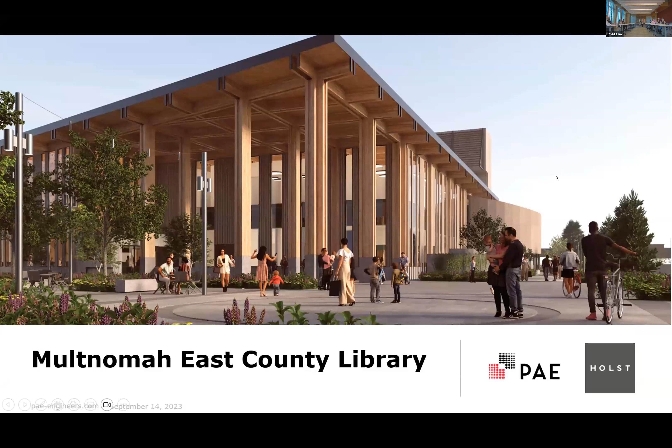Great, thank you for the introduction. Well, I'm going to go ahead and share my screen. I'm going to switch computers here, bear with me a minute, see if we can get this all set up. So can someone confirm that they can see this online? Yes. Great.

I'll introduce myself really briefly. I'm Jeff Beckford with PAE, associate principal. I've been with PAE for 19 years. Sadly, I recently relocated to Los Angeles, but I love Portland and we'll be coming back often. I'm really super proud and excited to be part of the Multnomah East County Library project. I've been involved with a number of projects around Portland, and it's bittersweet for me a little bit, but I love this project.

So I'm going to go ahead and get started. I'm going to do the nuts and bolts here initially. We already shared some of the learning objectives. Really hope you walk away with these four things, really understanding how we engaged with the community at large to develop this project, which wasn't our idea. And that comes through - I think you're going to get that a lot when you see what Dave is sharing.

We also want you to understand some of the resiliency that's a factor in this building, as well as operational and embodied carbon, so we'll talk a little bit about that. Some of you understand that already, but maybe you'll come away with a better understanding. And then how we're achieving some of the energy goals established for the county going in. So those are essentially what we're going to talk through: sustainability, resilience, carbon, energy, and some follow-up at the end about how that works with the sustainability frameworks on this project.

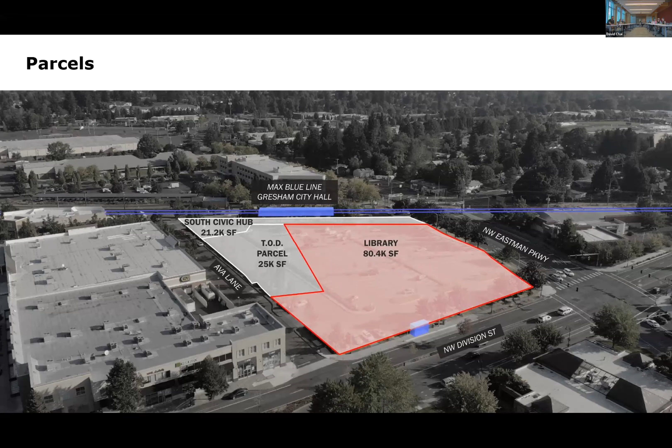And so then another piece of the puzzle was trying to figure out how we get people to interact with the frontages of the library. The library won't really have any back door or any backside. It has 4 sides that all front major public thoroughfares.

Eastman to the east, Division to the south, the light rail to the north, and then a new pedestrian connection that we're calling the north-south. We now call it the spine, connecting the light rail stop to the max stop to the bus stop to the south.

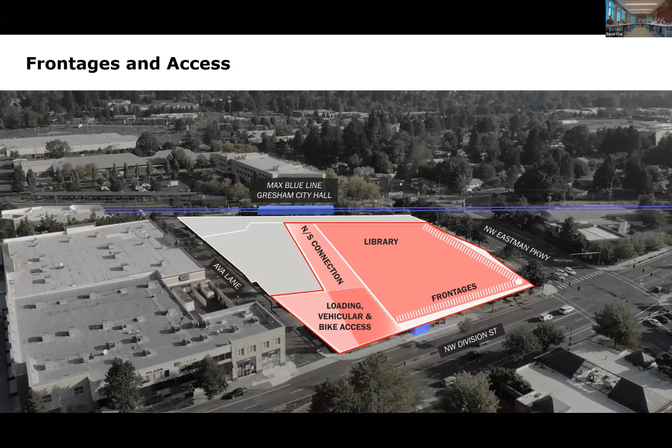So people will be able to walk on all 4 sides of this building without ever having encountered a back door. Loading vehicular access will go underground off of Ava Lane from the west to a below grade parking structure and loading bay, including the tall library trucks.

And so then we wanted to show a diagram that kind of explains the overall concept of how the building would get laid out, that also then impacts the site design.

We broke the building up into a few different zones. We wanted to make sure you could get into this building very easily from multiple locations, so there's 2 main entries, one on the north, one on the south.

That north-south spine connects through the middle of the site, and that's really where the public can engage with the library, where the most public aspects will be. The middle of the library is really where the stacks and the books will be for exploring, and then focus areas, places of quiet, places of being alone or being introspective are along the east with views out to Mount Hood.

And then I think, let's see, what was the piece I wanted to say about engage? Well, I'm sure it'll come to me as we keep talking. Oh, that's what I also wanted to say.

One of the things we recognized very early on was the high amount of wind that exists out in Gresham. If you've ever spent much time in Gresham, it can be very windy from the gorge. Part of why we're putting a lot of emphasis on that north-south spine is because we're trying to use the building as a windbreak to shield from the easterly winds, so the entrances are on the west.

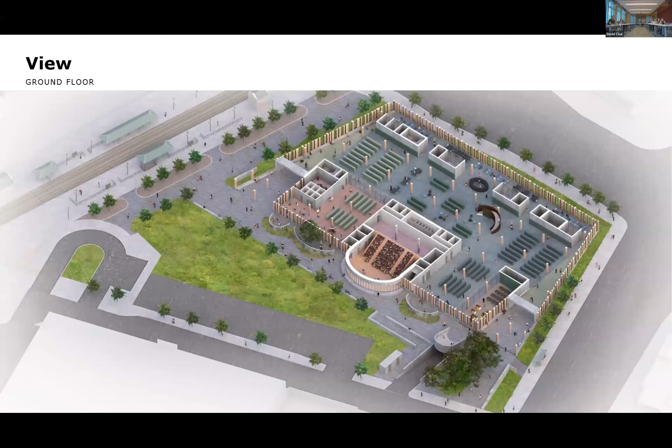Here you can see a cutaway plan section of the first floor. This is that north-south spine coming through here, the ramp down to the garage below.

One really interesting program element that was added early on was that of an auditorium, about a 250-seat auditorium. Through community engagement, we recognized that there are not very many places for people to gather in East County, especially folks that can't afford to pay for space. So Bailey and the library team and the design team really wanted to find ways to infuse as many gathering spaces as possible.

And the auditorium is a really big piece of that. There's no other room like that in the library system here in Multnomah County, and especially out in Gresham, it's very hard to find spaces where you can have presentations. So that became a sort of organizing element that is a central piece to the library.

And then you can kind of see how that parti of engage and explore and then focus kind of lays out in the floor plate.

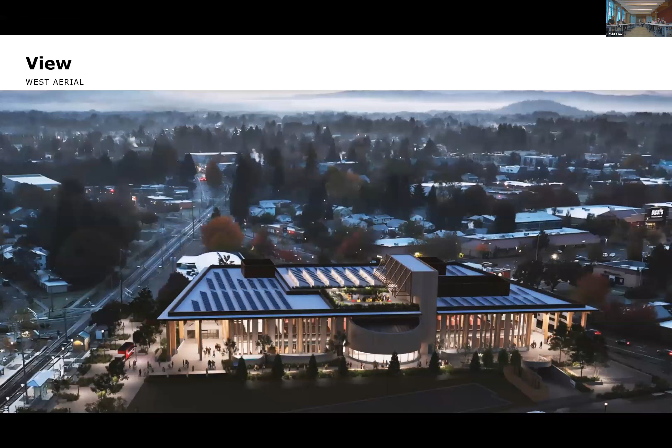So I'm just going to give a really quick tour around the building and then go inside, and then we'll hand it off to Jeff to talk about the meat and potatoes of this presentation, which is the systems, the resiliency, and the energy reduction.

This is a view looking to the east. Downtown Gresham is beyond, and you can see that auditorium in the middle. We are planning for a rather large roof deck on top. The auditorium and roof deck will be able to be open after hours and have after hour events, potentially for rent. They're still trying to figure out if that's something the library can manage, but it should be a great asset for the community.

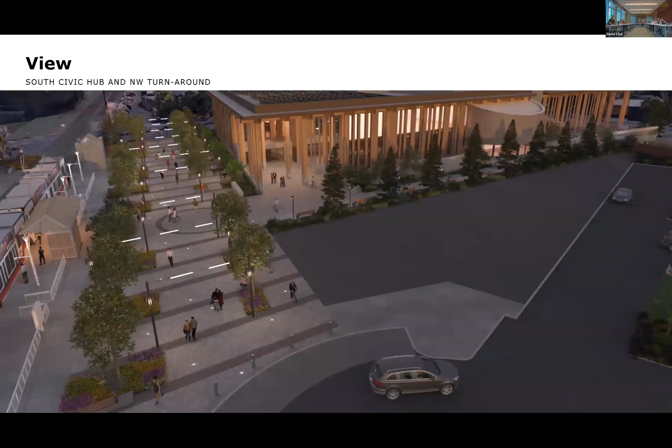I'm going to start at the turnaround where there was supposed to be a street, but now it's a pedestrian zone that we call the South Civic Hub. We've been working with NARA Northwest, the Native American Rehabilitation Association, as a sponsor to get a Nature in Neighborhoods grant to really increase the richness of that space, with lighting, better paving, more furniture, and really create a beautiful civic space between the light rail and the library.

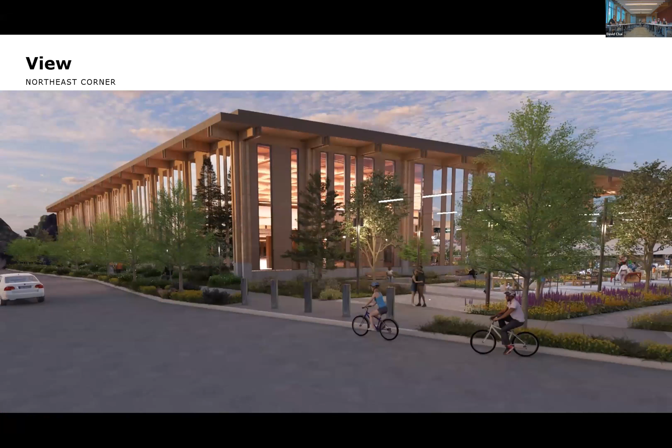This is looking as you headed south on Eastman, and this is the entry to that South Civic Hub. This is that landscape experience I was mentioning, where we don't have entries to the library on this side of the building, but we do have a rich experience with nature as you walk along the sidewalk.

Some stopping places. We have a lot of nurse logs that will populate around the edge of the building as impromptu places to sit and for nature to slowly take over.

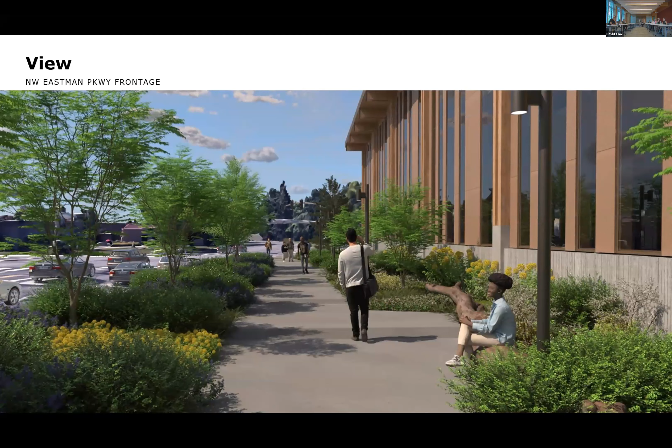This is looking at the intersection of Division and Eastman. We do have a significant amount of money dedicated to solar panels that Jeff will talk about, that are also going to be tied to a battery system, which is pretty cool.

Here you can see at the southwest corner of the project, that's the south porch. Because the library wants to all be at a single level for universal access, we do wind up with some grade challenges on the south side of the site, about 4 feet between the sidewalk and where the finished floor of the library will be.

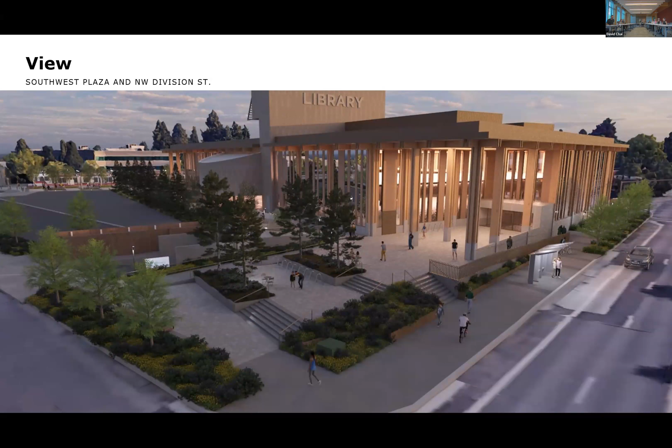So we're trying to use that as an opportunity to create a series of outdoor rooms and spaces that can be programmed in different ways throughout the year, and make that an elegant transition as opposed to just a large set of stairs. We're trying to find ways for everybody to be able to access the library easily, whether you're walking or on wheels.

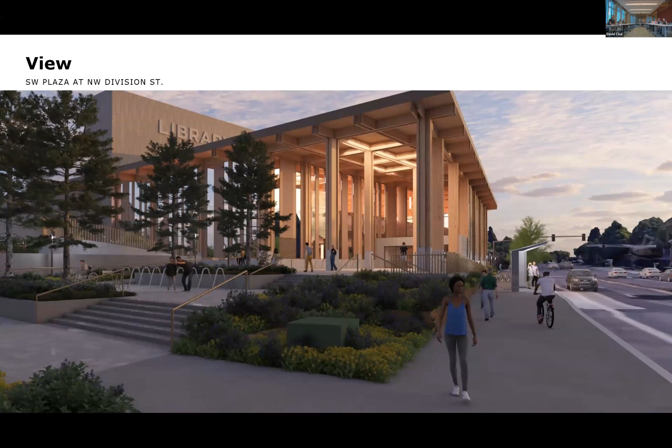It's sort of that southwest corner, looking back at the bus stop and the south porch.

And so now, as you go inside the library, this is the south lobby. The north lobby is sort of a mirror image of this. We can start to get a sense of materiality inside the building - it's all mass timber and CLT.

We're working through a lot of the details right now, but it's a pretty exciting opportunity to really elevate our game when it comes to how we detail and specify our timber. We're working with Timberlab as our subcontractor.

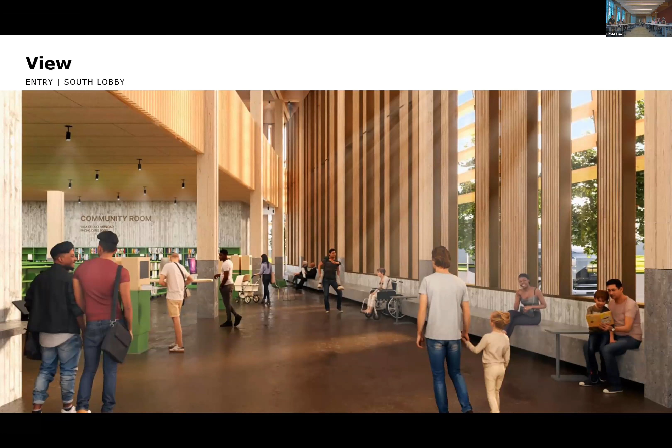And the palette of the building is really quite simple. It's mostly wood with a little bit of concrete for floors and foundations, and a little bit of metal here and there for access or accent points like the stair or the roof coping. But a very limited palette of as few materials as possible. We really want to infuse natural colors, natural materials, and biophilia into the library.

I mentioned other spaces that we've heard about from the community. Makerspace is another big hit that we're hearing a lot about, so we're going to have a very large makerspace workshop right off of the south entry, right off the south porch. We'll actually have the ability to open out into that porch, kind of an indoor-outdoor experience.

Multnomah County Libraries had a really successful program at the Rockwood Library with a makerspace, and this is modeled on that, only about 3 times the size. I should say this library will be comparable in size to the downtown Portland Library. We're at about 95,000 square feet.

And I'm sure a lot of you worry about the budget. So right now we're sitting at about $99 million.

This is the children's play area that opens up to one of those curved wall protected outdoor spaces.

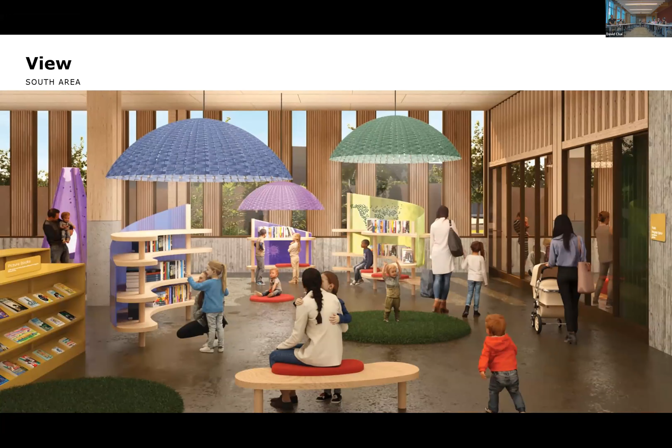And then the auditorium, we are really excited about the idea of the auditorium being able to be activated, or have the auditorium activate that north-south spine with events that have this sort of indoor-outdoor interaction, to spark people's curiosity and wonder and desire to come into the library to see what's going on.

And then eventually go up to the roof and get some amazing views of Mount Hood, and be an amenity that doesn't exist in many places in East County.

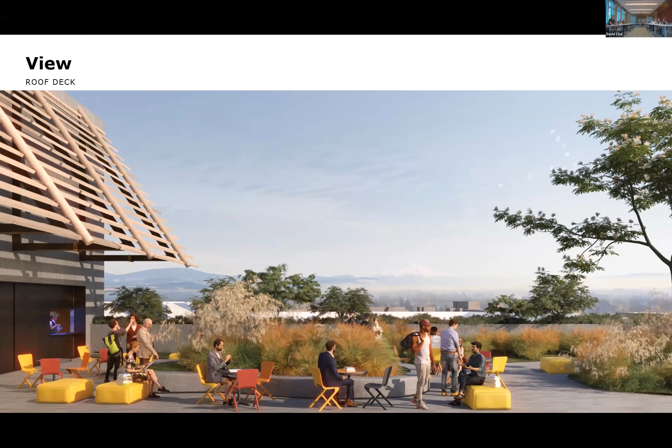So that's my nickel tour. And with that, I'm going to hand it off to Jeff to talk about the rest of the presentation.

Thanks, Dave. I wanted to circle back on the engagement process real quick too. One of the things we learned working on this project early on was there were a lot of people that had a lot of opinions and a lot of input that they wanted to provide. And the language that we use as engineers isn't the language people use a lot of times, just their daily language, the way they talk about things.

So we met with a library user group pretty early and held some charettes to talk about sustainability. One of the first things we did was ask, what does sustainability mean to you? We defined some things for them, talked about sustainability and some of the different factors and aspects of it. But what we really wanted to get out of that group was, what's most important to you?

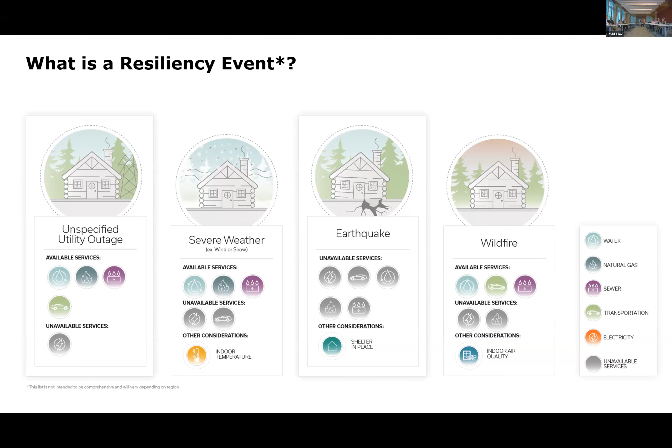And then what does that mean for what you want to operate while that event is occurring or after it happens? This was an important thing to discuss, because it really gets into how you design your mechanical systems to respond to fires with filtration. With earthquakes, does that mean you want backup water, or backup power for it to operate independently? Severe weather, how should that building respond to severe weather events that we now experience on an annual basis, with the heat? These are all conversations we felt we needed to have with the user groups in order to determine the system basis we should pursue.

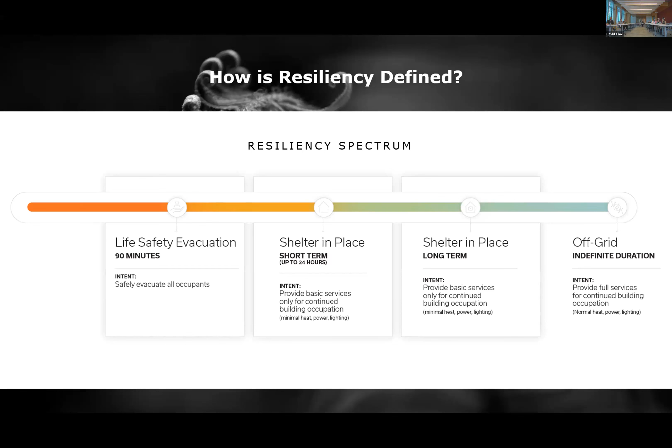The next step of that evolution is, how long are we talking about? Is this for people to get out of the building in a timely manner, giving them some time to get out after an event? Or is it something where we want the building to remain in operation longer, for people to shelter in place for either a short-term or long-term period? Or do we want to be able to operate the building indefinitely? For those of you who have experienced this building, the Portland Living Building, or PAE Living Building, is actually one of those off-grid situations. Do we want to go to that level with the library? That was a question we had.

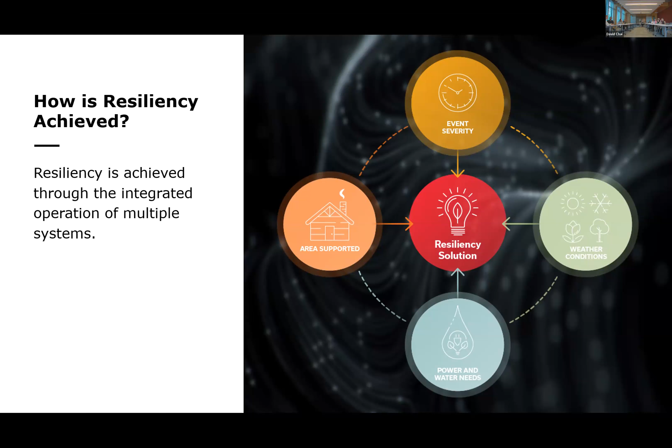So how you pursue that with the systems is the next step. Now that you've defined the goals, how do you achieve that? I'm not answering that question intentionally just yet, we'll get to that. So that's resiliency of the building.

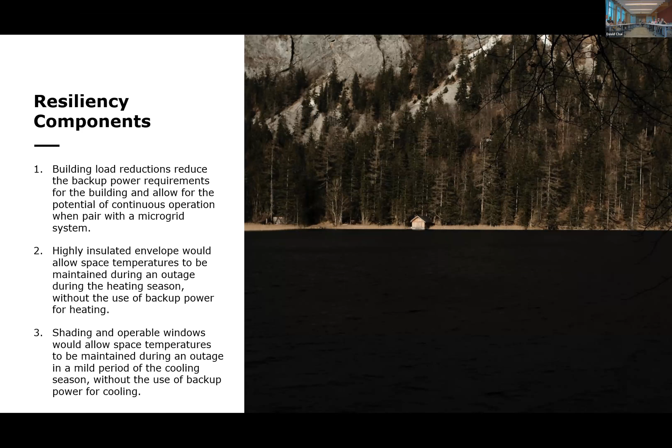There are other non-mechanical system decisions you can make regarding the envelope and daylighting, the amount of light you get into the building during the day, that let you leverage your building to be more resilient. If you have a well-insulated, well-sealed building, you can insulate yourself from some of those weather events you're experiencing. Daylighting lets you take advantage of natural light during daytime hours to compensate for a power outage, let's say. So those are all things you need to think about with resiliency and what you're trying to achieve.

On this project, as Dave mentioned, we have a 1.5% budget that we need to pursue for solar panels. That's one big factor for this project. We have that budget to provide a PV system, and we do have it on the roof, you see it prominently in the renderings, a lot of PV there. But in order to maintain operation of the building during a power outage, you actually need more than that. You need a battery storage system, and that's another system this project will have.

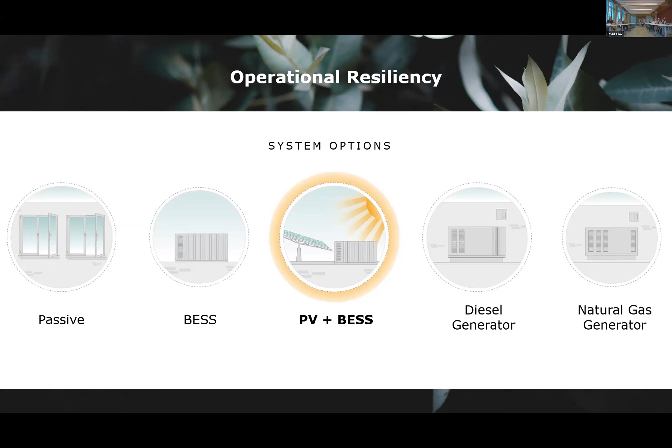There are other grant sources as well. Beyond the budget, we're pursuing grants to fund portions of these systems in order to maintain a resilient building. So yes, this building will have a PV system, a microgrid, and it will be able to operate for a period of time when the power is out. It'll really be a magnet for people in that vicinity. If the power's out, the library is still actually going to be operating, so they can come to the library as a place of refuge in a sense, even though it's not technically designed to be an area of refuge, but it'll still be a magnet.

Maybe real quick before I get into the rest of that - we did spend a lot of time optimizing the envelope as well. You saw the overhangs in some of the renderings, and those will do a lot of work to limit the solar heat gain within the building. That's an important factor, because different facades will have major solar heat gain, which affects indoor comfort. You're able to bridge more time of maintaining a comfortable indoor environment if you have a lot of shading, which we do have with those major overhangs, which we studied and which work really well.

So now I want to switch gears a little bit. We talked about resiliency, now let's switch to carbon and define that a little bit. There are some aspects to carbon I want to make sure people understand. So how do buildings themselves contribute to greenhouse gas emissions? Really, they contribute in 3 different ways.

Embodied carbon entails all the materials that go into the building. We haven't talked a lot about it, and Dave didn't really mention the wood structure, but the major carbon footprint of a building typically is that initial structure. So wood, like this building here, is actually carbon negative for the total carbon footprint of the building, because it's been sequestering carbon in the life of the trees used for the structure.

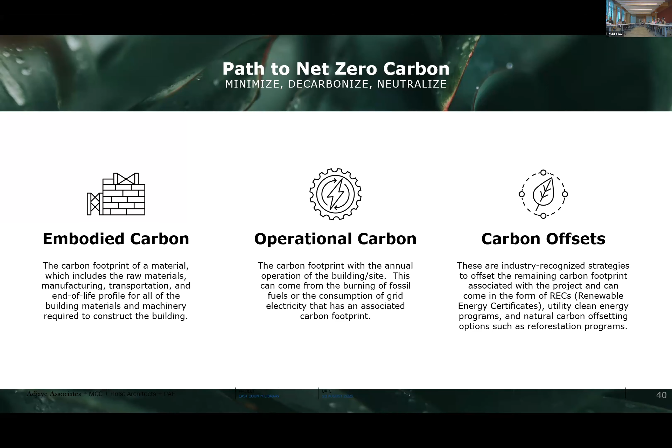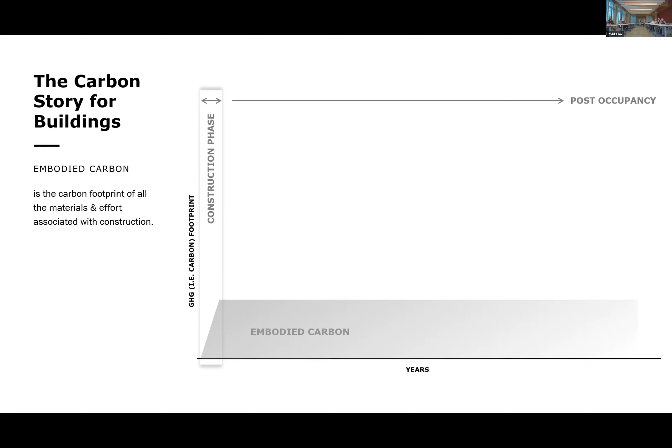So what does it really look like on a building? Let's say a typical building - the gray bar here is embodied carbon, that happens day one. You build the building and you've got a carbon footprint right off the bat. Then you have operational carbon over time, so your carbon footprint grows.

You have a couple ways you can do this. You can build it per code, and it's going to have a certain growth of carbon footprint, or you can do a better building than code, so your line is still growing but it's a little flatter. And then you have something else to take into account - the greening of the grid. I don't know who's familiar with the House bills passed for Oregon, but Oregon is mandated to green the grid. Over time, we will have a carbon neutral electrical grid, so one thing you can do to help your carbon footprint is electrify your building, which will then become greener and greener over time.

That's the third bar, 2R, and then ultimately going net zero. Net zero means you're essentially locking in your carbon footprint to not expand beyond your embodied carbon. That's ultimately one of our goals - to see more net zero buildings go into production. Then you can draw down, meaning you're generating more power than you actually use, so you're taking a chunk every year out of the carbon footprint produced when you built the building. That's aspirational - regenerative design.

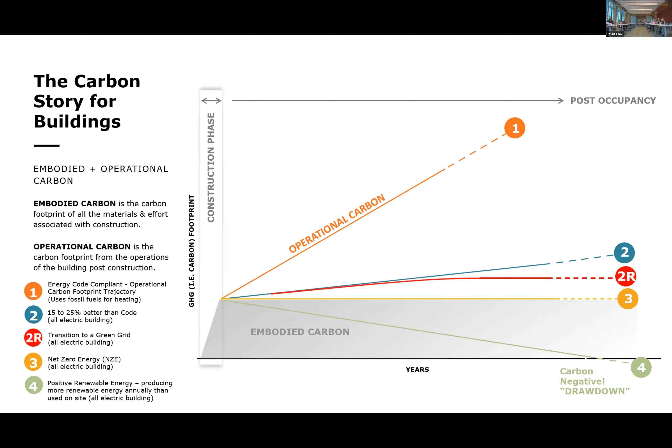So that looks kind of like this. If I were to give you a path to net zero carbon, this is the path: minimize your carbon footprint from the start by analyzing your materials. Minimize your operational carbon as well. Decarbonize by going all electric, looking for the most efficient way to produce the heating and cooling you need - those are technologies within the mechanical system. And then pursue the carbon offsets you can purchase. That's the carbon cycle.

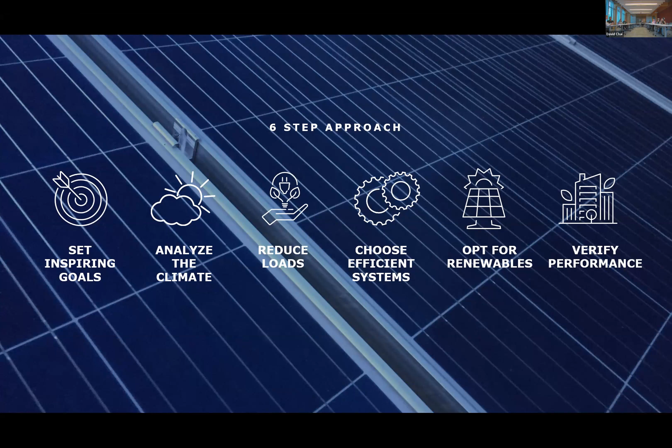Once you've done that - minimized your load, your capacities - that's the time to implement renewable sources for that energy, because it's going to be the most cost effective. And then you need to make sure you actually perform in doing what you're doing. That's an important last step you should pursue.

Talking a little about the climate - this was an early effort for us to determine what we can do from a passive design standpoint. We have a very temperate climate in Portland, a great place to live because of that. We're not the Southwest, not the Southeast or Northeast, which have very extreme climates. We have a big portion of the year where we can actually pursue passive design.

That could be natural ventilation, or utilizing your mechanical system even to provide what we call economizer air into the building - really utilizing outdoor air. If you can expand that passive zone, that takes even bigger advantage of preventing active heating and cooling. You can do that by expanding your comfort range. That's one strategy we talk about a lot, as well as using passive elements like shading and overhangs to make people feel comfortable.

Radiant temperature is another thing we attack in this category, by pursuing an overall full comfort value in a space. So it's not just temperature within the building, it's other factors that lead to people being comfortable - the temperature of surfaces, and also creating air movement within the space, which further expands your passive zone of conditions within a building. But you can't go into any of that without analyzing your climate first - it's an important first step.

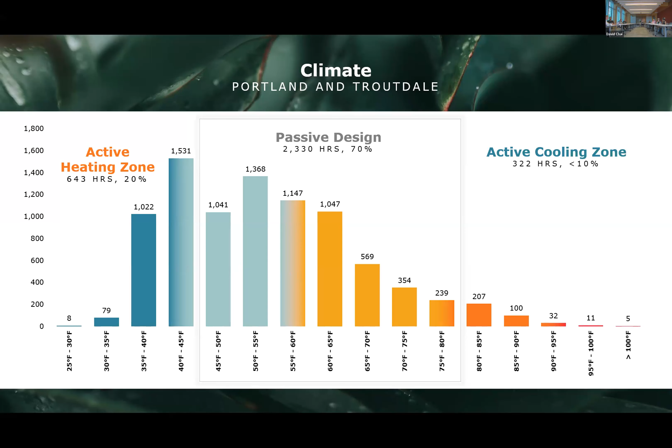And then envelope optimization. Envelope optimization really goes into a lot of different things - building tightness being a really important one. A tight building design, minimizing air infiltration, will make the building much more comfortable as well as save a lot of energy. We analyzed various R-values for the walls to optimize that, and window sizes to optimize between daylighting. We want to daylight the space - we accomplished a very well-daylit space, but it's also a weak spot in the thermal envelope of the building. So hitting that sweet spot between the two is important.

As well as ensuring you're handling glare within the building with appropriate shades, which also results in people being comfortable because you're minimizing solar gain within the space - as well as the views. We want to make sure we've got a lot of great views within this building, and that's an important aspect as well. You want people to see the nature and landscaping we have outdoors, and to feel that we've accomplished expanded biophilia within the building by getting those views.

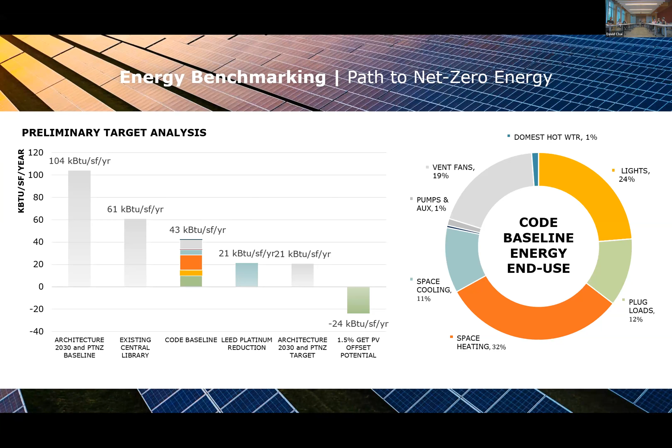Hot off the presses, our energy use intensity that we're projecting right now is at that 21 point. So we are right there at our budget before PV is applied.

And so now we get into selecting efficient systems. Now that we've optimized the envelope and analyzed passive systems, here are the nuts and bolts of what we're actually going to be incorporating into the design of the building.

First, a dedicated outside air system. We want to make sure we have a well-ventilated building. We're pursuing well-ventilated systems and filtration to address the wildfire issues we have on an annual basis, so filtration has been a big conversation. We'll have that dedicated outside air system, so it's not recirculating air—we're pursuing high indoor air quality.

It's also in relation to COVID. Coming out of COVID, people want to know how we're ventilating the building. Again, it's a non-recirculated system, so we're getting fresh air throughout the building. It also has heat recovery, so we're recovering the energy from the exhausted air back into the ventilation air being brought back in—a very efficient way to reintroduce outside air.

We're also decoupling heating and cooling, which is important for energy reduction, because the outside air can react to ventilation requirements within the building and vary based on occupancy, while the temperature control can operate independently and heat and cool the space as needed, in a more efficient way than doing it through the air.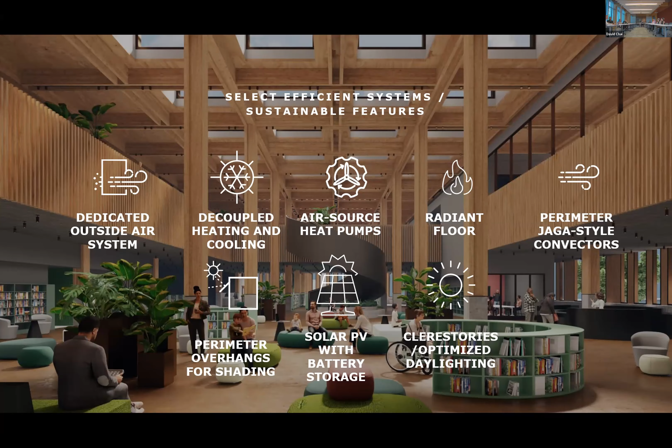It doesn't come through in the sustainability piece so much, other than it is another embodied material to think about, having to replace that equipment. It's also hydronic, so it's not using refrigerants, it's using water.

Yes, good point. So the last section I have, before we hit the questions, is sustainability frameworks. As I mentioned before, sustainability goals were an early focus of ours, and it's important to establish that because that's the North Star you have. So we did do that early, and I'm leaving this for last, but it was a really early thing to consider.

Where I wanted to take this is the study we had done on various frameworks. I intentionally didn't use the word rating system, because they're all different. LEED is one we're all familiar with, and actually the county is pursuing a LEED rating on this building. As a result of our analysis, LEED was the pursuit on the project.

Gold at a minimum. I think we're tracking platinum. Yeah, we're doing what we can to hit platinum, but that's the minimum goal for us, is that LEED gold.

But we did want to talk about these other frameworks because they have some aspects we may want to incorporate into the building, whether it be the Well Building Institute, meaning a healthy building and design around that, the Living Building Challenge, which the PAE Living Building is meeting, or portions of the ILFI, which is core. So it's really pursuing aspects of those different frameworks.

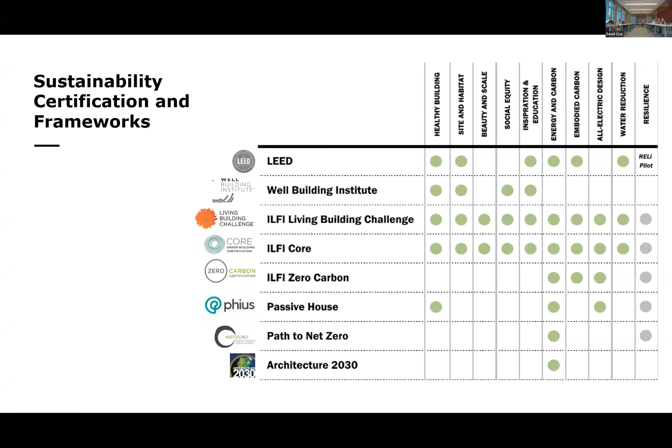Passive House being another one of great interest, focusing on envelope design being important, as well as Path to Net Zero, which we pursue with the solar panels. And then Architecture 2030, we're tracking every project to that. So really we're capturing quite a few pieces of these various rating systems within our design, even though our North Star really truly is a LEED gold building or better.

And so we also asked for people's feedback. We provided that information to the group to decide, is there something more than you want to pursue than just LEED? So this is the word cloud, and you did see that when people learned more about these rating systems, there was a lot of interest. Passive House being a big one, and that's again focused on the envelope—spending your money to really design the building to be resilient in that aspect.

So we wanted to get this out there and pursue these various options. I think we're doing a good job of blending that, but again, our North Star being LEED.

So with that, I want to leave with one last inspirational quote that I've seen, from Paul Hawken, who is a pretty inspirational person in the sustainability world. There's a lot of negativity out there sometimes about climate change, and I love his perspective because it's a positive one. So I'll just read this.

It's that the great dilemma we're in is that we get to reimagine every single thing we do. There are two ways of looking at that. One is, oh my gosh, what a big burden. Or the other way, which I prefer, is what a great time to be born, what a great time to be alive. He's excited because this is our generation that's designing buildings now, the one that really gets to change the world, change the way we do things. And so I love that—it's inspirational for me, it gives me hope.

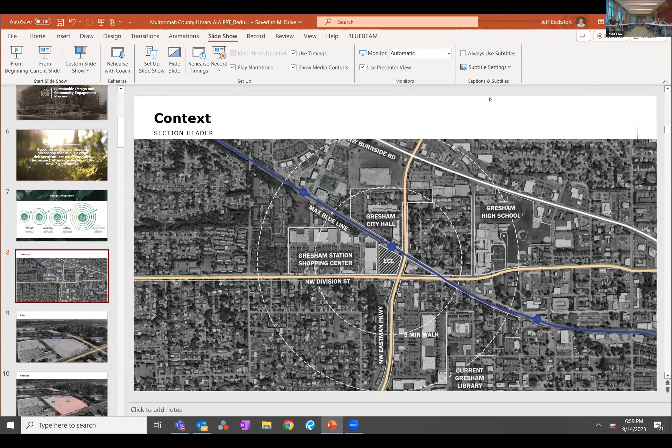Stormwater, I'll talk about really briefly because we actually had a super elegant solution come from Gresham, from the city planners. There is a retention pond right between Gresham City Hall and the Gresham Station Shopping Center that was designed just for that use, to take the entire neighborhood's stormwater and put it into one central pond that will treat that water. People kind of forgot about it—it was built probably, I'd say 15 years ago. One planner who was in one of our workshops said, hey, there's a pond down the street that I think still has capacity. So then we talked to Jordan Schnitzer and his folks that own the Gresham Station Shopping Center, and they said sure. We came up with a shared use agreement and we're piping all of our stormwater there, which actually saved us a ton of money. So it goes to a natural way of treating the stormwater—really a win-win for the project.

What was the second part of your question, Jim? Heat island. Oh, heat island, yeah. Permeability and heat island. Yep, you bet.

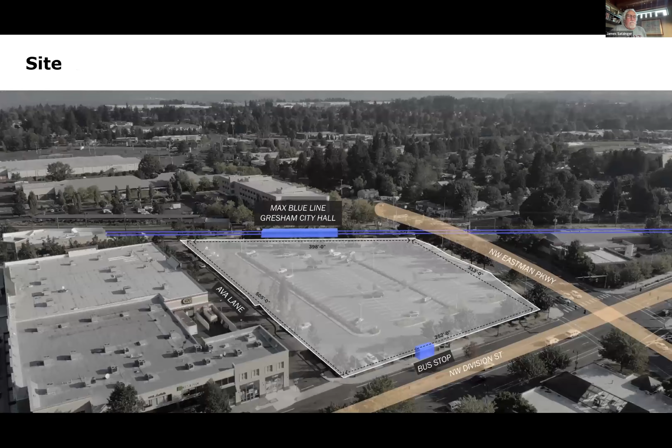There's always a balance, like with the South Civic Hub, the pedestrian zone to the north of the building. They have visions of that becoming a festival street, so we need lots of paving areas for food trucks, vendors, tents, and all sorts of events that will happen there. So there's always a delicate balance between how much green space you provide versus paving for events. But the amount of planting and the budget the county is accepting for this project's landscape is higher than all of their other branches currently, and it's been a big focus of PLACE Landscape.

Thank you. Yeah, you bet.

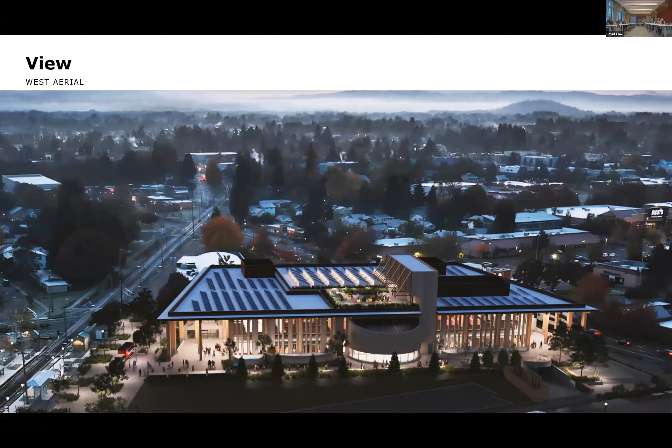Yeah, I'm happy to participate in your questions though. Cool, go ahead. I just have a question - so when you design the form of the buildings, have you taken into consideration the shopping center, and why is the entrance that way?

Because I know that's where the Best Buy is, and it's the back of the Best Buy, so I'm wondering how that's affecting the views, considering it's the main entrance. That's a great question, and it's something we talked about a lot.

Even the zoning code for Gresham called to have the front doors on Eastman or Division, or both, facing towards downtown, facing the main streets. And we made this decision to kind of flip the building on its side and put the entrances on the west.

And you're right, looking at the back of Best Buy and the loading zones and all of that. There's a couple reasons we did that. One, I mentioned the wind and really trying to create microclimates where we have peaceful places for people to come into the building, and we're not fighting doors that won't open and close.

The other thing was to get away from the traffic and the noise. Eastman's a very busy street, so is Division. So trying to have people come into the building from a place of peace and a people-centered place rather than a car-centered place.

And then the other piece is we know that big box is not going to be there forever. There is going to be, like I mentioned before, this parcel that's going to be an affordable housing mixed-use type of building that's also going to become a huge piece of this urban place. And it's going to affect what that north-south spine is like, and it will create a bit of a buffer between the library and the shopping center.

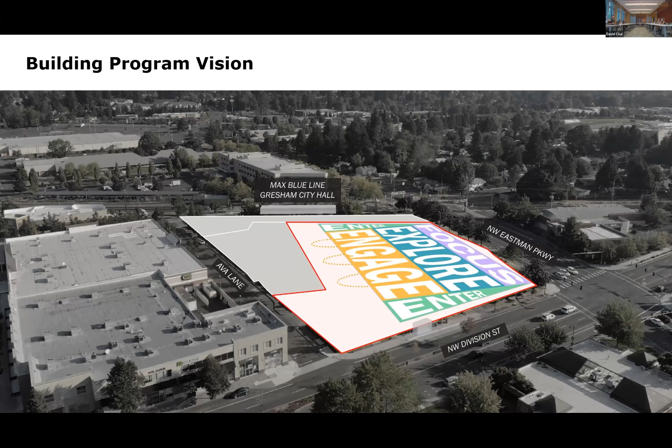In fact, the Gresham Station was designed to have public streets that actually go through their parking lots, which is a pretty cool idea. Patty, I don't know if that was anything you had to do with, but they aren't just parking lots, they're actually streets. So it'd be very easy to turn those into building pads where there's now surface parking and do higher density.

So basically, long story short, we acknowledge that the building right now is not looking at the most beautiful thing, but it's also why we have really lush landscaping that's going to act as a buffer between there.

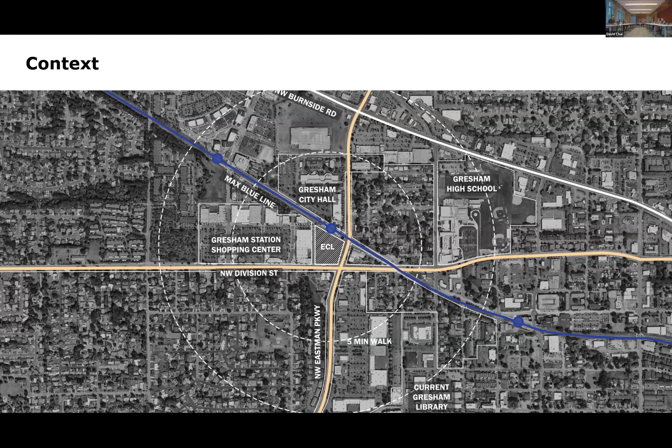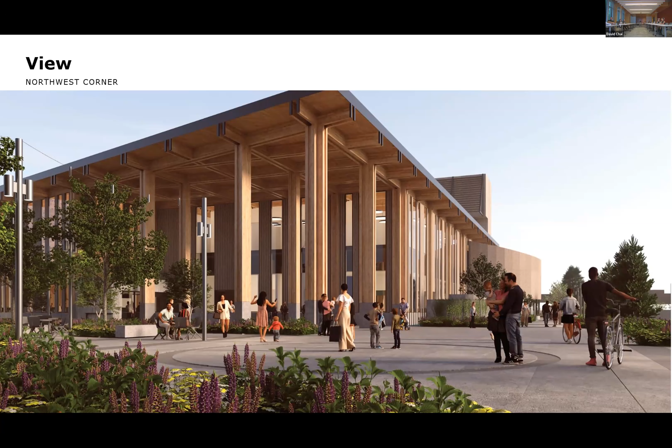In some ways, those distractions are kind of what we're hoping for, that we're hoping for this lively interaction. We do have a curtain system that is being designed so we can close it off if privacy is required, or if there becomes some kind of event that we want to close that off.

But we really want to have that back and forth, and having kids run up and put their face on the glass - that's the kind of thing we want to see happening, and to have the library be this piece of curiosity that really draws people in.

I won't pretend like we don't have some naysayers that think, well, we're just going to have the curtains closed the whole time. That certainly has been something we've heard, but we also have some optimists that are really excited about the opportunities of how to have that indoor-outdoor connection.

Those were great. Yeah, that'll be a really fun social experiment, just to see how the audience reacts to that background and how the background reacts to the audience. It'll be interesting to see. Patty, you were just saying something?

No, I was saying there's a great precedent for it in the original design of the Colosseum, where all of the curtains would open, and there's the city in front of you. It was a great way to relate the audience back to the city. And they had, as you know, curtains that would then close it on occasions.

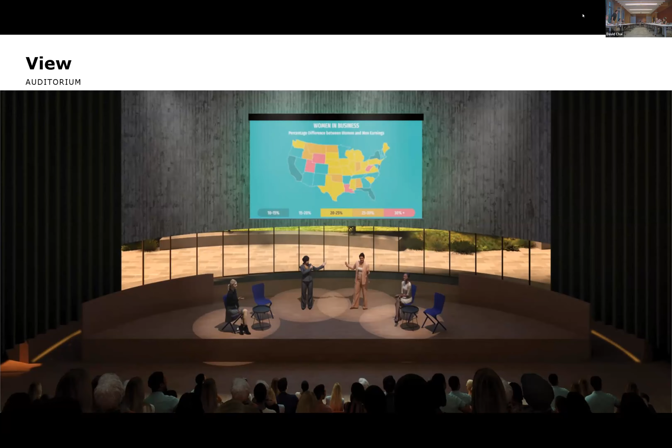Thanks for hosting, Jeff. Very beautiful, generous place. Thank you. Our pleasure.